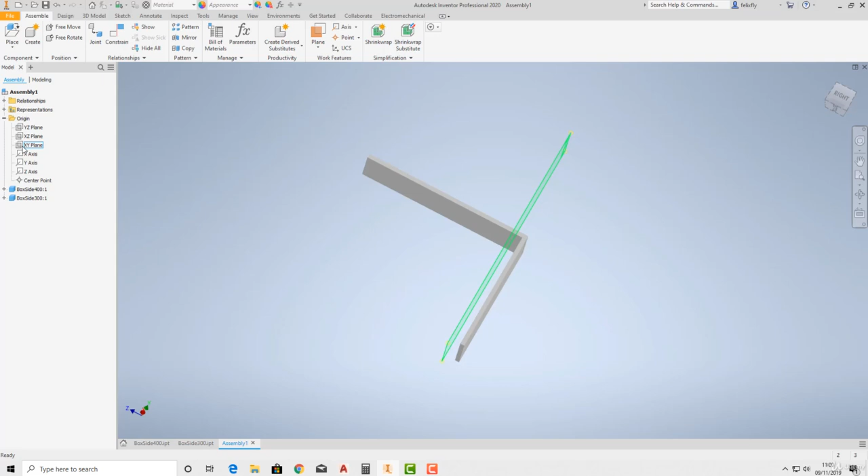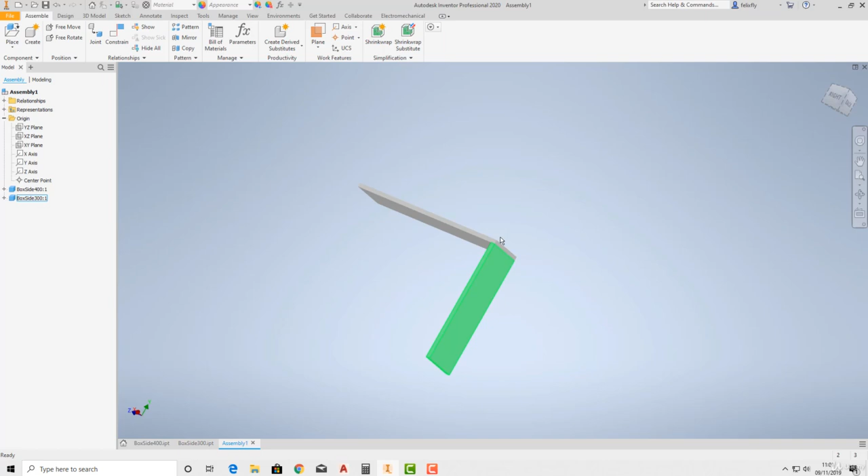Remember when we did parts and talked about keeping them symmetrical? It really does depend what it is you make and whether it's as important in terms of assemblies. But you can get to a stage where you're connecting an assembly to another assembly, and you have whole trees and hierarchies with different assemblies. So it's still good practice to make assemblies symmetrical where you can.

So what I'm going to do is turn on our planes by right-clicking them under Origin, right-clicking and going to Visibility, and just selecting it. You'll see our origin planes come on, and our origin is this point here.

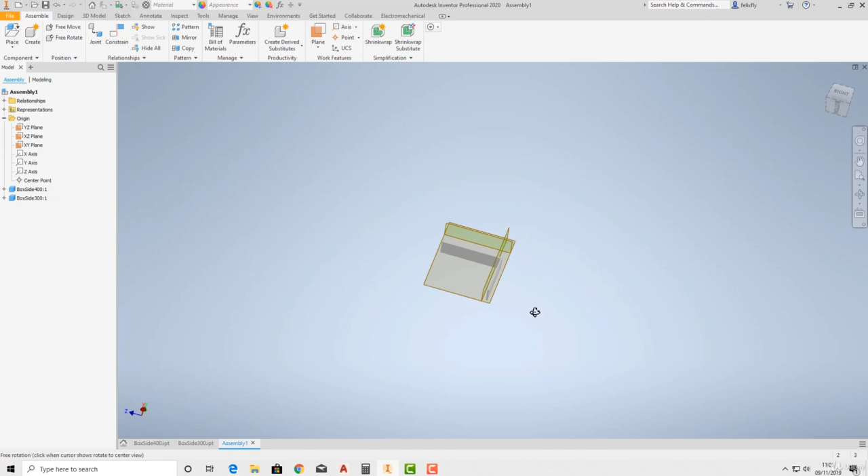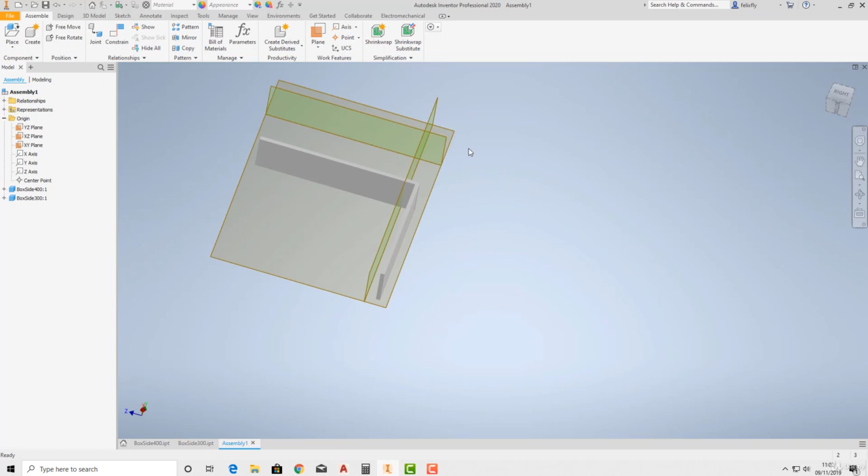So what I want is for everything on this box to be symmetrical, because it will make it neater and it's just good practice. If you're doing simple models at home for hobby use, you don't really need to worry too much about it, but it is good practice, and if you went into industry you'd be expected to do it that way. So I'll demonstrate it, and it's up to you if you go to that degree, but it's good practice.

So all you need to do really is work out a length. We know that's 400, okay. So then you can constrain, and that is the correct face.

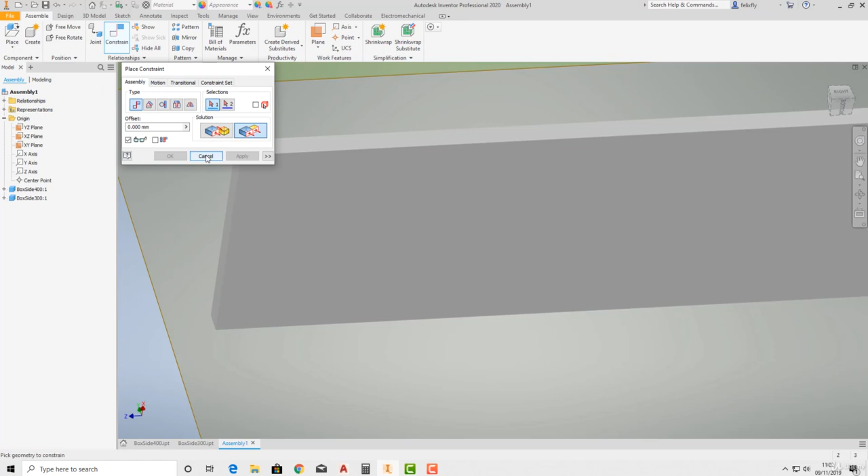So we could constrain, we could make this—let me demonstrate this actually. This would be a good way to demonstrate offsetting constraints.

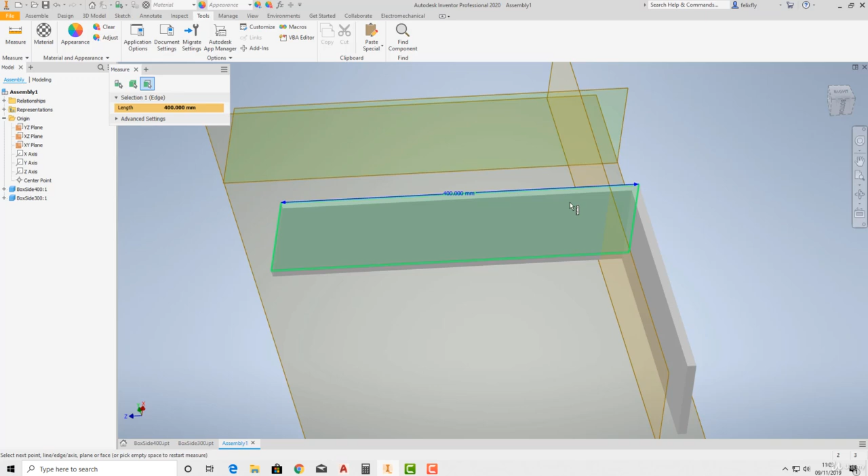So we know this length here. Let me just go to Tools and Measure. This length will be 400, okay, of our box.

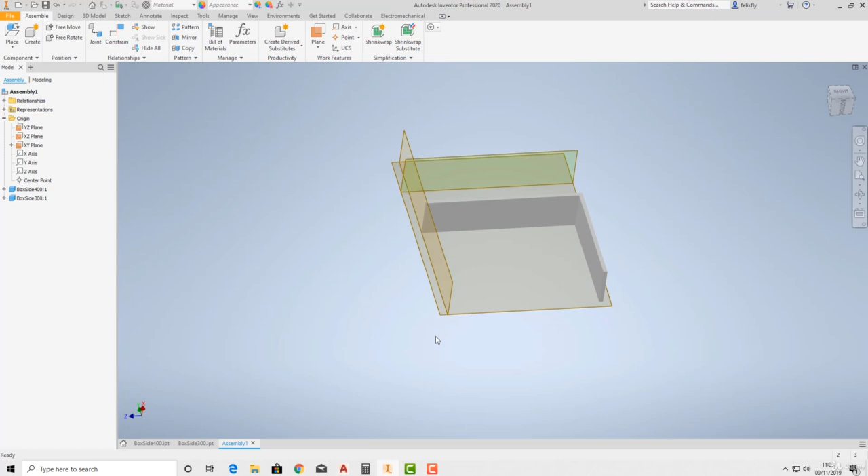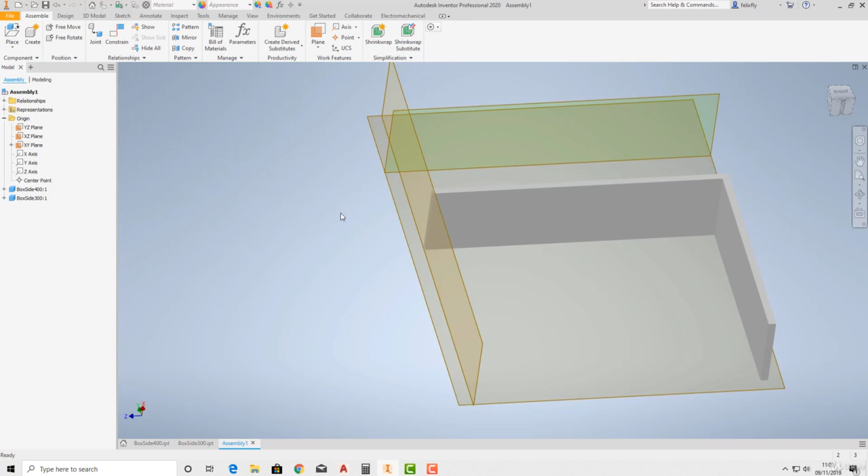So if I was to constrain and make this face flush with our origin plane in this direction, well that's not really putting it in the center, it's putting it on the end. What we want is for the plane to be through the middle of this box really. So when you use these constraints, even though it's a flush constraint, it doesn't actually need to be flush. Flush is just the basis of setting something out.

We can actually move this into the center, and this is something you'll do a lot. You'll use constraints, but then give them an offset from that constraint. That sounds a lot more complicated than it is, but this is something you'll do all the time.

So in order to get the center of our part on this plane, well, we know the distance is 400 and we have a flush constraint on this end. So what we need to do is say, I want this end to be flush with this plane and offset by half the length, which will be 200. Well, we can do that.

We can select our part, which is highlighted here. If we click on the arrow, you'll see you get these mate, flush, flush. This is actually a list of all the constraints in the drawing related to that part.

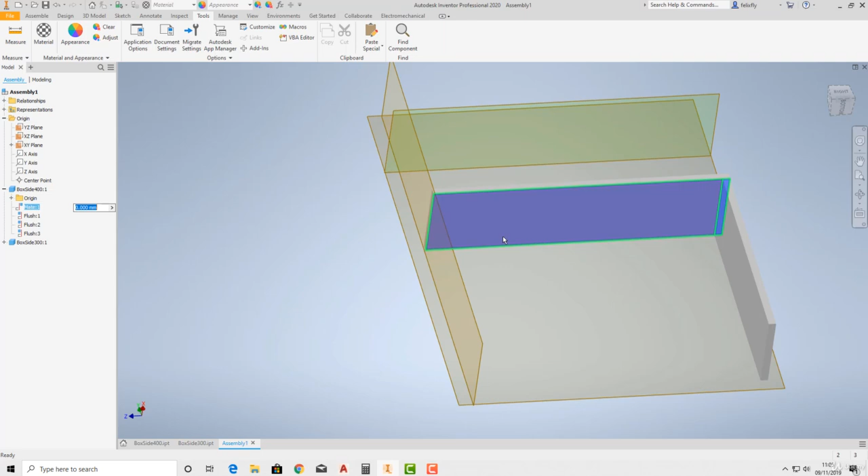So if we click on mate 1, we get two different types of blue or purple light up, and that shows this mate constraint relates the face of this part to the face of that part. So we know that mate constraint was when we joined the end of this to there, because it's highlighting the two surfaces. Likewise, if we click on flush 1,

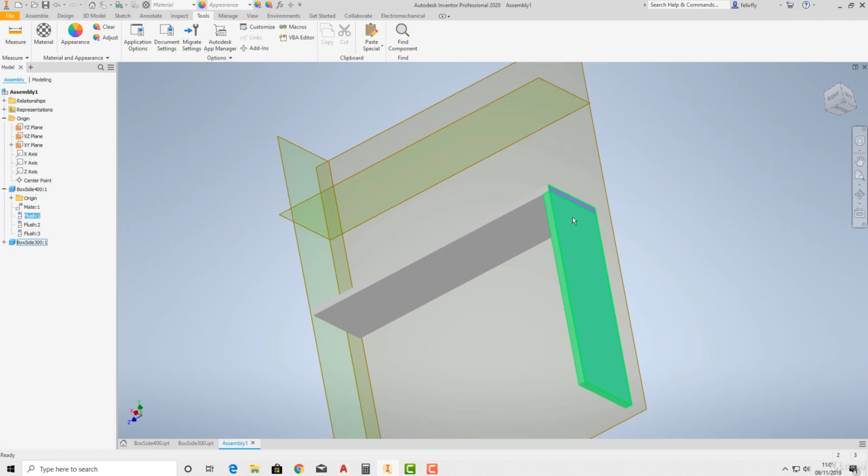it's highlighting these—we made this face flush with that one. Flush 2 shows us these two top surfaces. So we can see what our constraints were. And flush 3 is the face of here onto this plane.

If you double click a constraint, you'll see it asks for a dimension. Well, why would you need a dimension on a constraint? Surely flush just means put things flush. Well, this goes back to how we can edit constraints to work for us. We know half the length of this is 200, so if we put in 200,

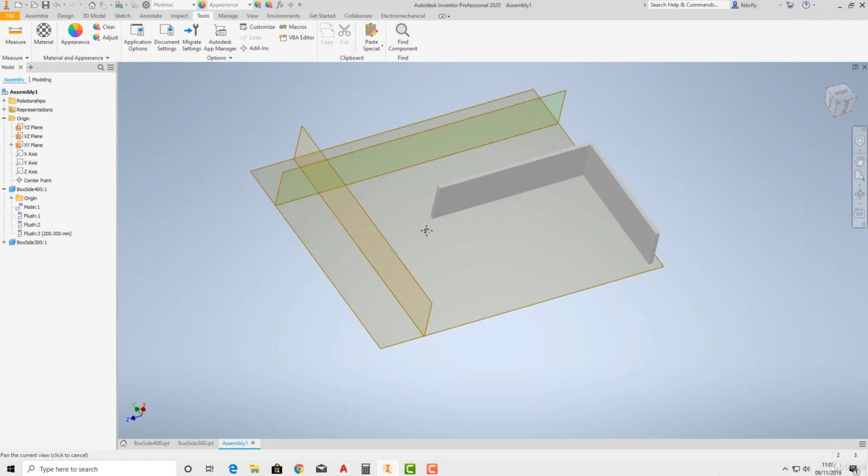we can see our part has now moved away from the plane—moved away 200 millimeters. In our case, we wanted it to move in the other direction. That's not a problem. All we need to do, if we double click that again, is put minus 200.

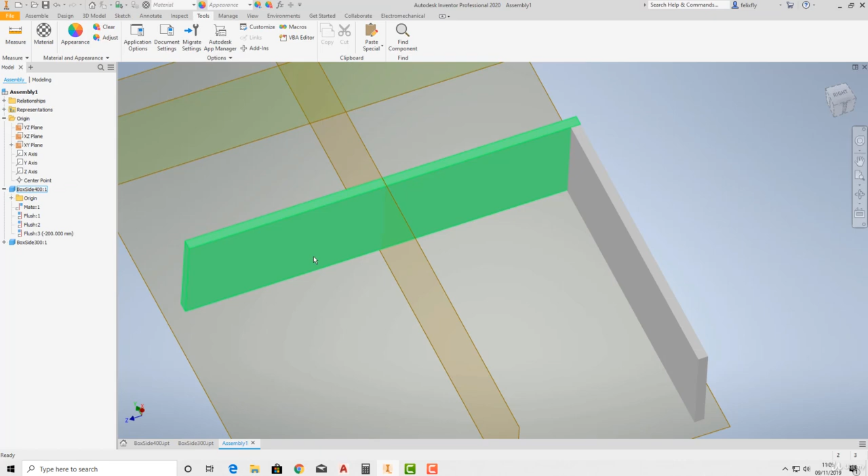And you can see now that what it's done is it said, okay, this face will be flush to that plane minus 200 millimeters. And because this is 400 millimeters, it basically put it in the middle.

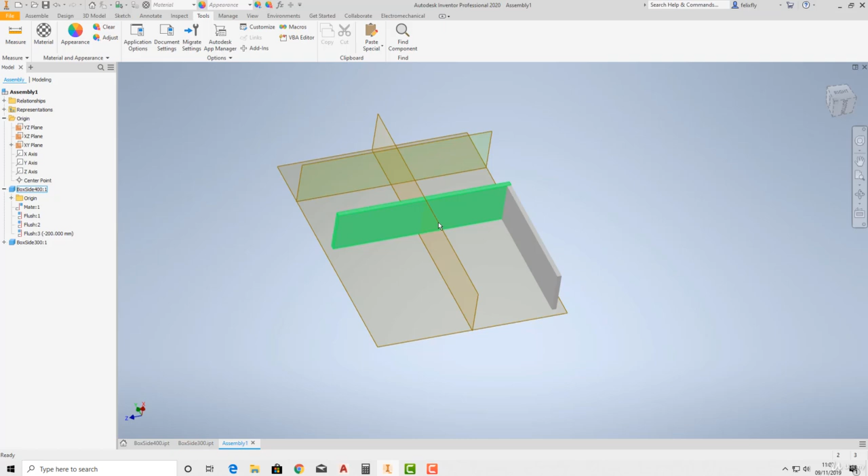I do get that probably sounded a thousand times more complicated than it needed to. It's one of those things where I'm trying to explain it and break it down, but just doing it should make it all clear. If you didn't quite grasp what I'm saying, just bear with us. We're going to do it so many times it will just become second nature, and I'm going to do it again now.

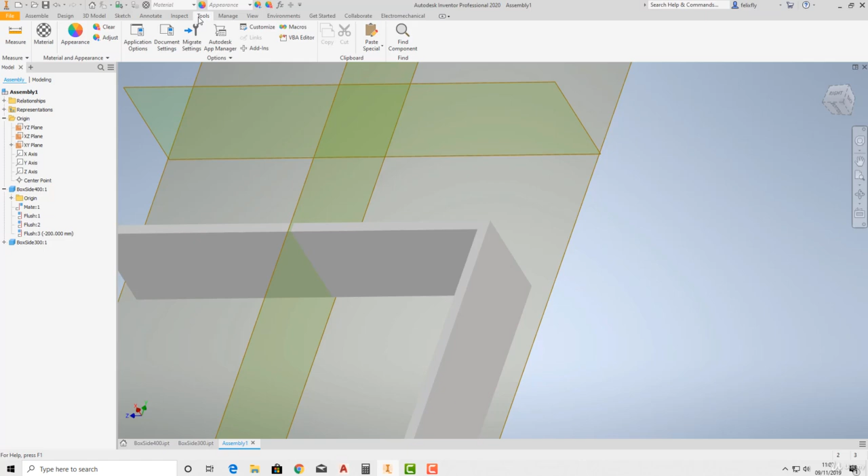Okay, so we go assemble, constrain, and we need to look at this because on this side of the box we will have 300, but we'll also have this 10 millimeters here, and again on the other side eventually. So that will actually be 300 plus 10 plus 10, so 320.

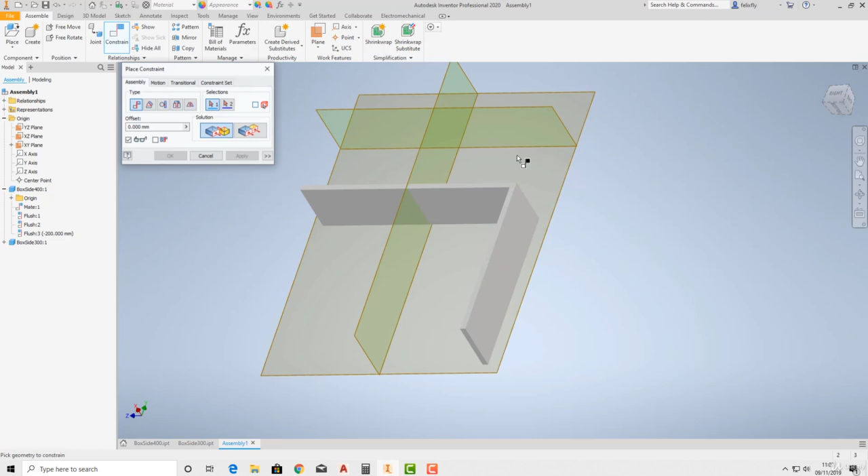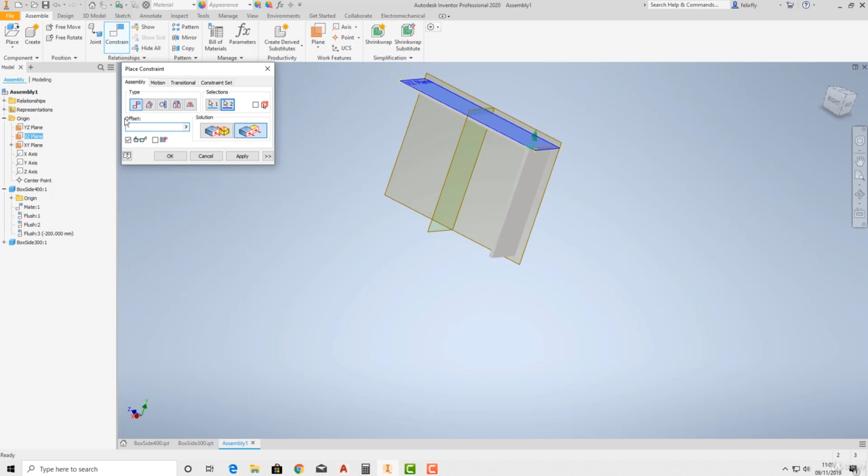We want to do a constrain on this side with the extra part, and we can type it straight in here. We don't need to do it and then bring it back up - that was just to demonstrate we can type the distance straight in this offset box. So let's go minus, so it's 320 divided by 2 is 160, and there we go, minus 160.

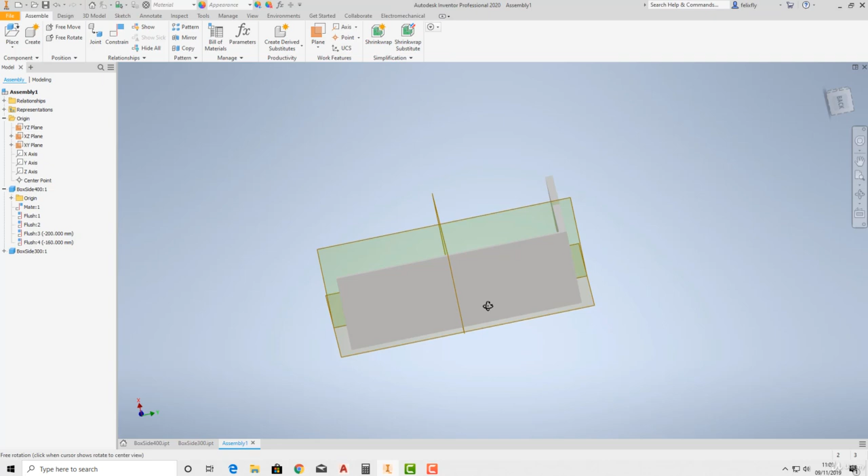So now, these two parts, because we've done that offset constraint, are centralized. It is sitting on this plane, so just to make things neater, let's move this up as well. We know this is 100 millimeters deep, so it'll be a simple constrain, and you can work through these planes like I'm doing here. You can see your face is highlighting green, so you know you've got the correct face.

In this case we could use either of these two. I'll use this one. So we want that to be flush with that work plane.

Now, you see this green arrow when we select - let me show you that again - when we select the face you'll get a green arrow, and it's kind of telling you the direction. Okay, so if it was a flush command, you'll see these two arrows are facing the same direction. That means that's because they're flush. Okay, if we selected that and then our plane here...

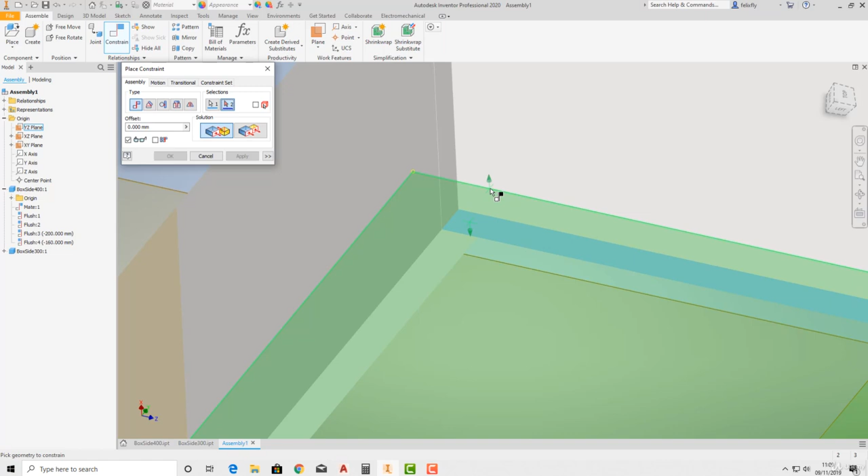It's not really flush, it's more of a mate because they're facing different directions, so it's almost like they're stuck together. So in this case, instead of using flush, we'll use a mate command. If the arrows were pointing in the same direction, it'd be a flush because the surfaces will be flush, as in facing the same way. When the arrows are pointing in different directions, it's a mate command. You can see that demonstrated here. If you get confused, it shows it. Again, this is something that sounds way more confusing than it is, and it will become second nature.

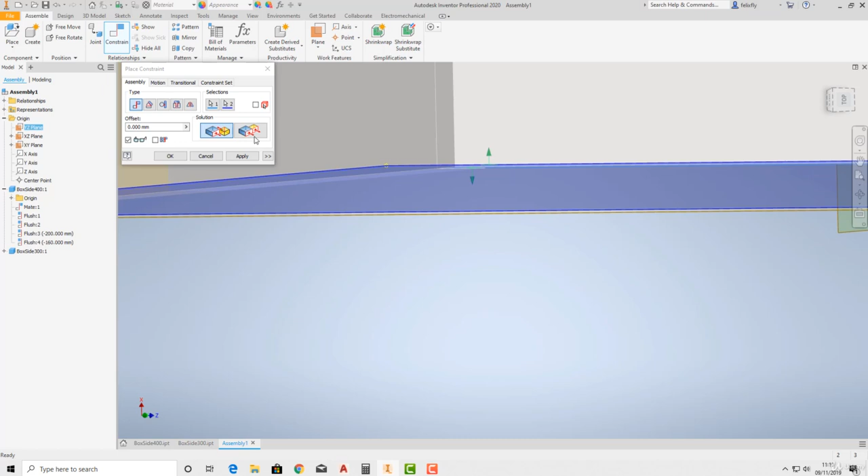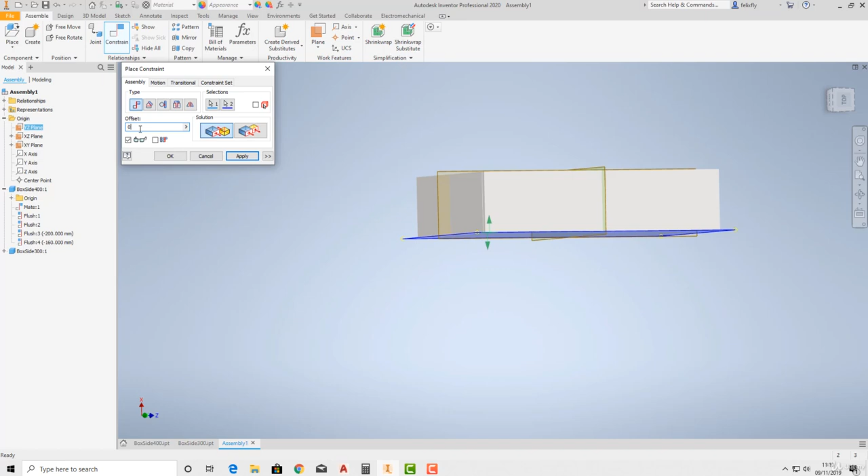But we're going to put our offset here of half of this, so that will be 50. And we can see, when you get these glasses here, these spectacles, that means it's going to preview everything. So if I put that back to 0, you can see it moves. Okay, and what we want is minus 50. There we go. If you don't have that much of a powerful computer, you can turn this preview off, and all that means is you have to OK it, and if it's not very good, just undo it.

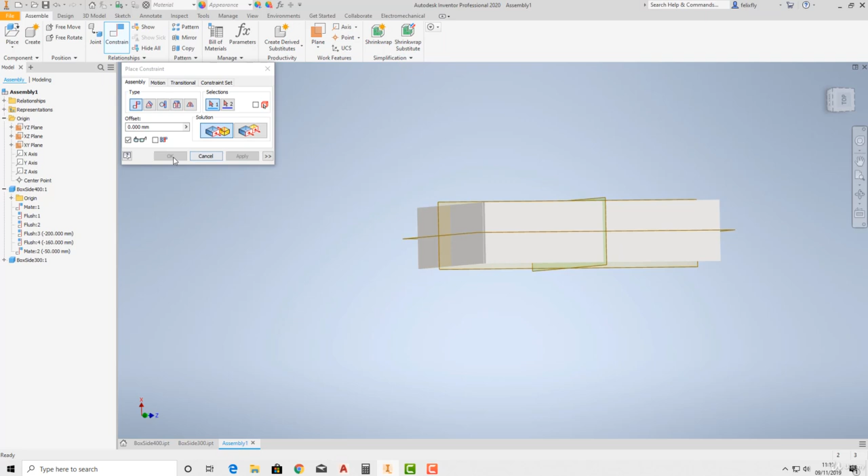But it does help you out if your computer's good enough to have this turned on. It's worth having it on so you can see how these commands react. So I'll apply that, and we can close that window. And if we look at the sides of our box, it's now completely symmetrical around the origin planes. So that is good practice.

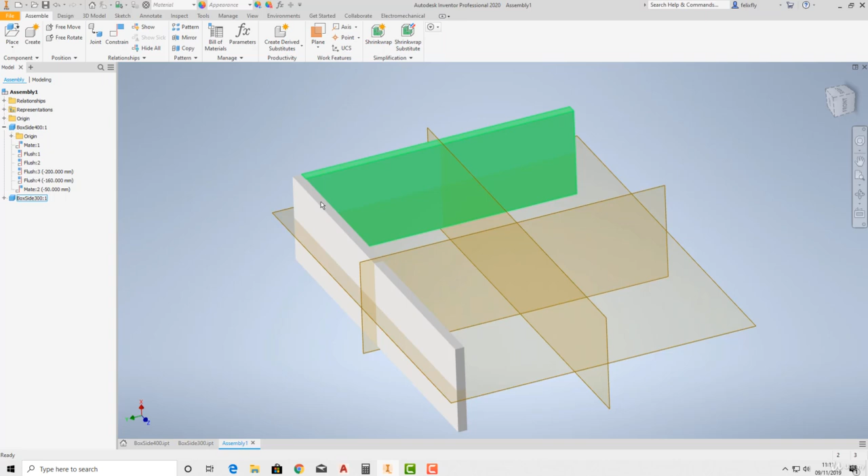It also means we don't need to really do as much work now. You might have been wondering why I've only done one of each side - well, we can just use a mirror command now. In assembly we have a mirror command, and it works just like the mirror command in part building.